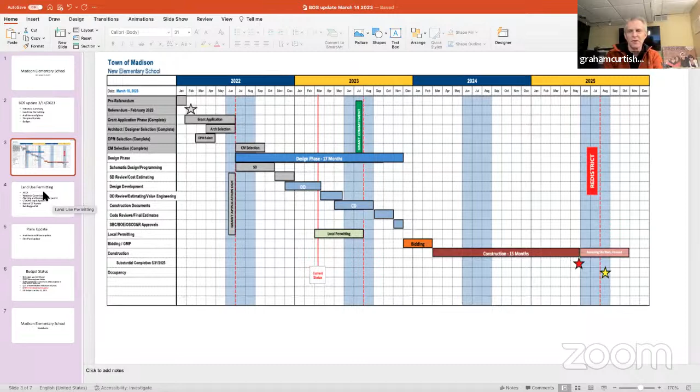Very good team, great job. I'm only a slight participant - the building committee's been great. We've had excellent owners reps on the call. Staff were great, so it's been very collaborative. I can hardly take credit for it. Colliers is doing a great job, and Adam Leviticus, who's on the call, has been a shining example of how to be an owner's rep.

That said, we're just starting this process now - the land use permitting process, outreach, and input. These are some of the boards we'll have to go through. The ACA, I'm sure you're all aware of - they'll review the plans for architectural and site plan issues, and they're advisory to the Planning and Zoning Commission.

We've already had some preliminary discussions. I think they may already have the plans, and we'll be meeting with them over the next month. Obviously we have to go through this process before we go to Planning and Zoning.

The Wetlands Commission will protect the environmental issues of the town. We've submitted that application already, and there's a site walk planned with the commission on the 18th of this month. They'll be hiring their own expert to review the plans, and we'll go back and forth with comments to make sure there's absolutely no impact. We're very comfortable with the plans right now, but we appreciate the input from outside experts.

Probably in May there'll be a public hearing. They've already determined this is a significant activity. There'll be a public hearing, input, et cetera, and hopefully come out of that in May or June with an approval.

Planning and Zoning Commission - this is a special permit because it's a school use in a residential district, so that will require a special permit and a public hearing. That process will probably follow the ACA and Wetlands Commission process, or run parallel to some extent, but it won't be approved until after those other elements conclude.

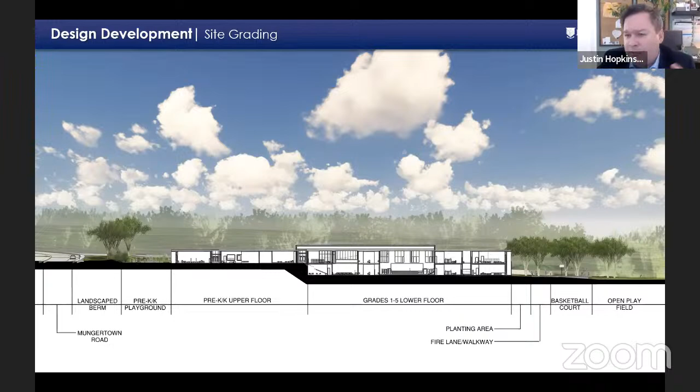To illustrate the topography change, here's a simple site section showing Mungertown Road to the left and the lower area of the site to the right. At the main building footprint, we're at grade closer to the western portion of the site, and at the lower level we're at grade at the lower portion. So from an accessibility perspective, for egress and access to the playscapes, each level of the building is at grade.

So I'm just going to move the audience out of the way. As Graham mentioned, we're studying locations of parent pickup/drop off and bus pickup/drop off. The current plan is to provide parent pickup and drop off in the lower parking area, allowing for visitor parking in area C and staff parking in area D.

We have approximately 185 parking spots available in the southern parking areas. Our age-appropriate playscapes are indicated in E. We have our pre-K and K playscape closer to where they are in the building, plus a hard court basketball court and an elementary age playscape.

One thing to mention about the bus pickup and drop off in the northern portion: we're investigating the concept of fleet-style or regatta-style parking for bus queuing. The impetus is to make sure we get the buses off the street so they're not queuing on Mungertown Road.

One potential benefit of this is that during off hours we can use it as overflow parking, accommodating approximately 40 additional parking spaces. Think of a basketball tournament on the weekend, or a STEAM or book fair night, where there may be more members of the public needing to park. The goal is to get everything off the street and onto the site.

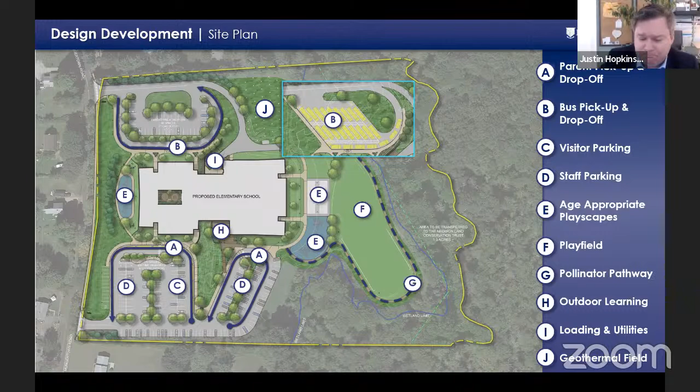So just a description of how these floor plans stack. You won't be able to read any of these floor plans, so consider these diagrammatic. The main level is to the top of the screen, the lower level to the bottom. You can see this in the exploding axonometric to the right, showing how these floor plans stack on top of each other.

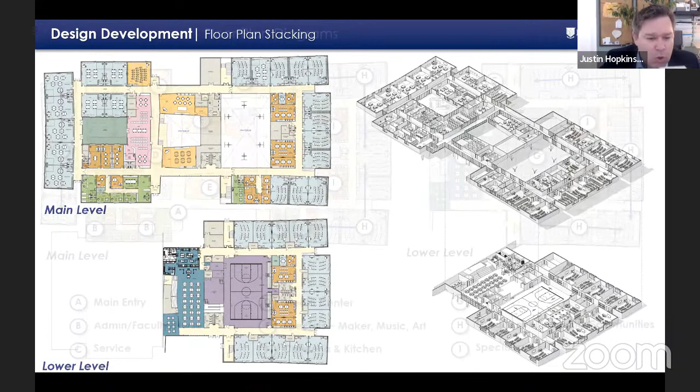From a building diagram, our main entry is directly adjacent to the parent pickup and drop off, and on axis to the bus pickup and drop off. Our main entry is through a secure vestibule to the administrative area.

Here we have our building admin and our nurse suite. We also have some faculty space closer to our curriculum areas.

In broad summary, our learning communities are indicated in H. At the main level, we have our kindergarten and pre-kindergarten. Towards the western portion of the floor plan, we have grades 1 and 2 towards the eastern portion. We also are locating our specials towards the heart of the building.

As you walk in, all of our specials are right in the middle of the floor plan, organized between the lower level and the main level, and within close proximity to each learning community. On the main level, we have our media center, art room, STEAM, and music.

The areas indicated in I are our special education and resource areas. What we've tried to do is locate them close to the learning communities in order to support any type of pull-out or push-in special education or resource closer to the students' classrooms.

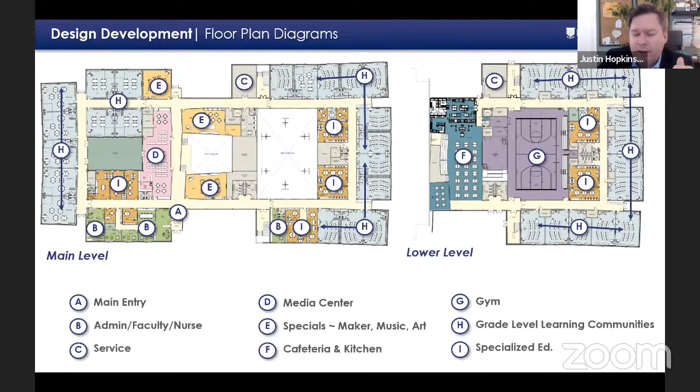Larger floor plan of the main level. A couple of things to mention as we're focusing on this: we do have an enclosed courtyard that is near the kindergarten and pre-kindergarten area.

This courtyard is open to the air, and the building perimeter goes around it. It's accessible through this corridor, but also accessible through the media center.

Our areas that are open to below on the main floor are the gymnasium. There's a wall, and the gym is a double height space, so along the corridors of our learning communities, we're able to look into the gym.

We also have a double height space over the cafeteria. One of the things that is really neat about this organization is that we have a tiered, or what we call a learning or communicating stair, that goes down to the cafeteria.

This double height space gives the opportunity to have informal instruction within the cafeteria outside of the lunch waves, but also helps connect the two floors, the main level and the lower level.

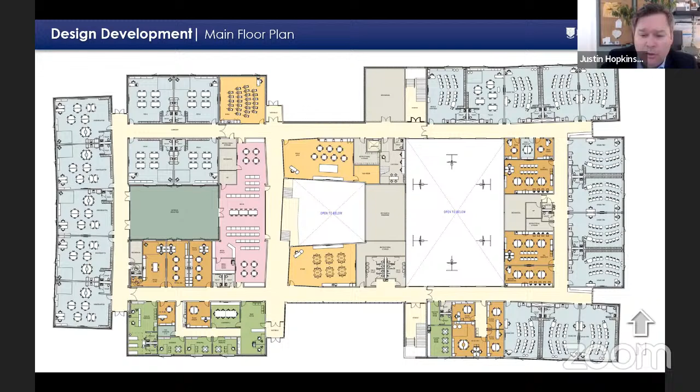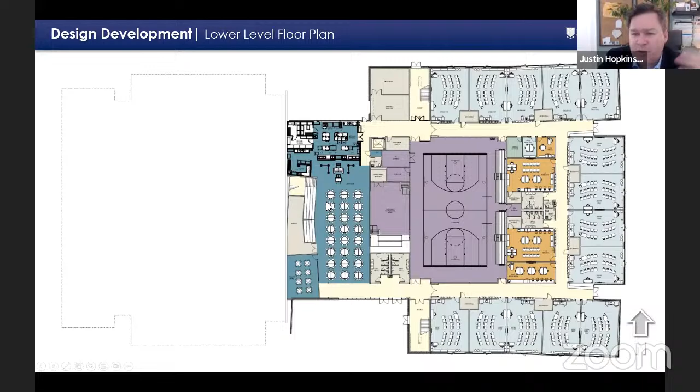As we go to the lower level, you will see we have some tiered or terrace seating that is directly on axis to the stage, but also fronts the cafeteria. The idea is that this double height space allows for some interesting, dynamic communication between the upper level and the lower level.

We have an in-classroom toilet space. We also have an area we call focus and learning, where the furniture or desks can be arranged in any way to support traditional learning, group learning, peer-to-peer, etc. We also have an informal activity space towards the back of the classroom for free group project-based learning, etc.

Some of the things we've been studying with the team are the flexibility of the furniture within these classrooms, the location of both fixed or built-in millwork for storage, and also what will ultimately be part of FF&E.

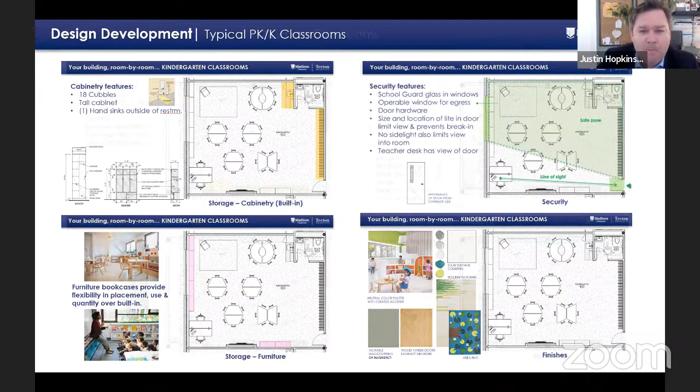Unfortunately, these are always considerations that we have as we look at these things, the ability to shelter in place during a lockdown scenario. So that's extended to our typical grade 1 and 2 classrooms.

You'll see very similar diagrams. The thing that's unique here is our grades 1 and 2 classrooms also have an in-classroom toilet. They also have cubby storage within the classrooms.

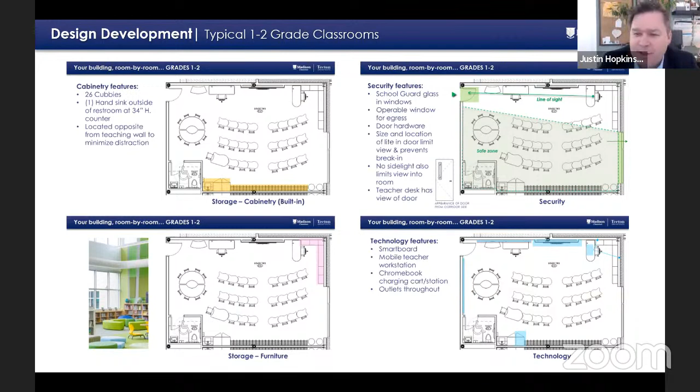The other thing we're obviously working through is where our technology is located to support the traditional teaching station instruction, but also make sure we have areas for mobile workstations, where Chromebooks can be charged, and where some of the power and data is within the classrooms. I know they're more detail-based conversations, but it's important for you to know that we're going through these.

Grades 3 through 5 classrooms, similar diagram, making sure that we're providing the same concept of the ready, set, go, focused learning and small group learning. Different type of furniture in here to support a more typical classroom setup, individual desks. These desks in particular can be organized in a number of ways to support a traditional bench setup, individual desks for test taking. They can also be grouped together for group-based learning as well.

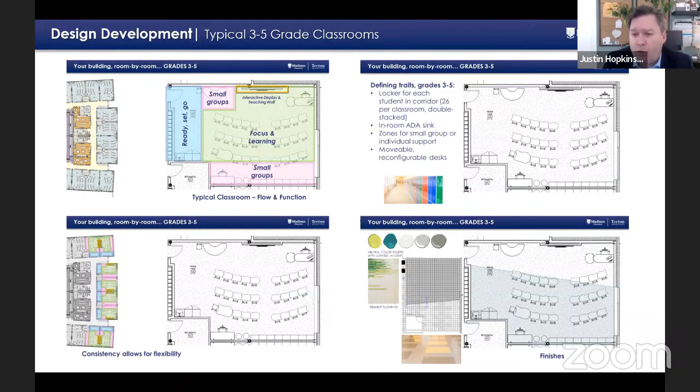And then finally, a perspective view to the entry cafeteria. This kind of reinforces some of the topography that we were discussing in the site plan, where we have the upper level main entry up the hill here, our informal learning area down directly adjacent to the cafeteria.

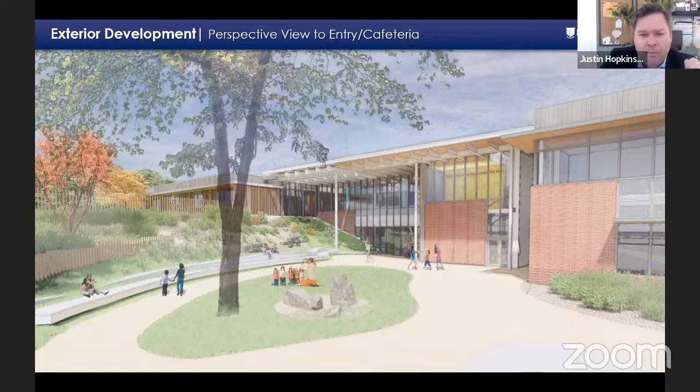So the idea is that for events such as that may occur in the cafeteria or the gymnasium, we can support a separate entry that allows community use of the gymnasium without getting into any of the curriculum spaces. So this area in particular would likely be the community entrance for those instances, nights, weekends, when an event is occurring there. So at this time, that's basically where we are.

As Graham mentioned, we're wrapping up our design development. Very interested in getting through the cost estimate process and reconciliation process. With that, I'm happy to toggle back to any of the slides if you have any questions relative to the material that we showed you.

Well, I want to thank you for the presentation. It's the first time actually I've seen all the designs, and it's very exciting. It's going to be a beautiful school.

I think one of the things when the discussion about purchasing the property 2 years ago, it sounds like there are some limitations because of the topography. So you can't have as much parking as maybe ideally you'd want to have. So it might be helpful to understand that a little bit more, like what restrictions you've had to moderate the design. It sounds like elevations. Is that because otherwise you'd have to do a lot more site work to level it all on one level, or is that intentional to just make it more aesthetically pleasing?

So I can tell you it's very rare that we have a completely flat site, and we have had a number of new buildings that have incorporated the changes in elevations on a site. So from a topography standpoint, the building layout works actually very well. One of the things that is nice about it, and I alluded to it as part of the presentation, is that we're able to get an at-grade means of egress at both floors, which is something we wouldn't be able to do if we had a flat site and had, say, a 2-story building. In the event of an egress situation, we would have to utilize some of the vertical circulation, elevator, stairs in order to egress.

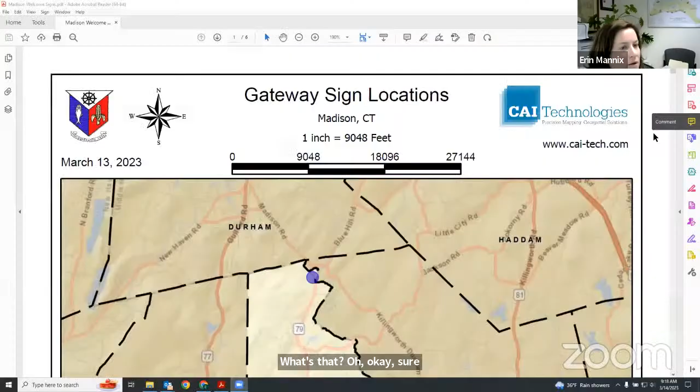Just kind of put together, and Sherry, maybe you would articulate this a little better, but basically, Sherry and I worked to put forward, and Sherry put the application before ARPA for funding for gateway signs, welcome signs, Town of Madison welcome signs at 10 entrance points essentially into town.

Those would include the north end, as you can see here. I can scroll out a little bit more here. The north end at Durham and Killingworth line, essentially on 79, the east and west entrance points on Route 80, and the east and west entrance points on the Post Road at Guilford and Clinton, and then 5 additional off ramps for Interstate 95.

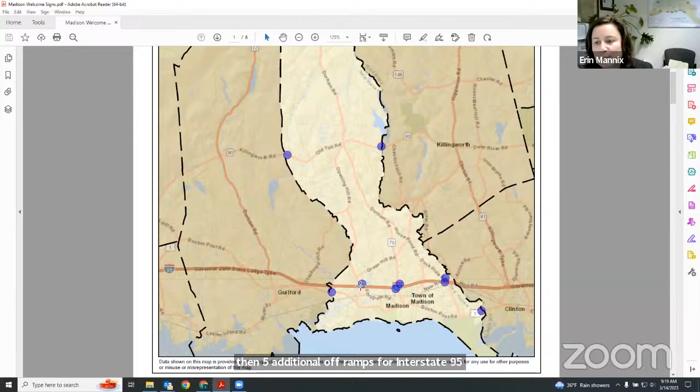So those were the 10 locations that were proposed to ARPA, and funding was received. And the funds totaled, I believe, 67,000. Sherry, was that correct? Yes. And that includes additionally some money for solar lighting so that those could be illuminated during nighttime hours without added expense to the town.

So we had met with a couple of vendors just to kind of get an idea and understand signs a little better and materials, and we saw a couple of examples that we thought were kind of nice. Starting from fresh here, we decided to use an example that we saw from the town of Voluntown that was really nice, carved letters. It's a high density urethane material, which is carvable. It wears like wood, but is a lot more durable. And so we just had some renderings put forward, various colors, various options.

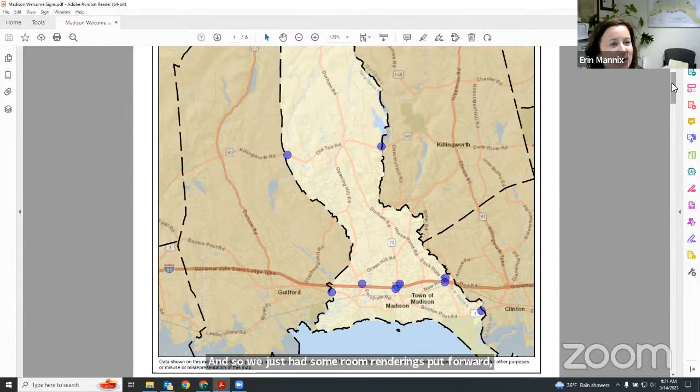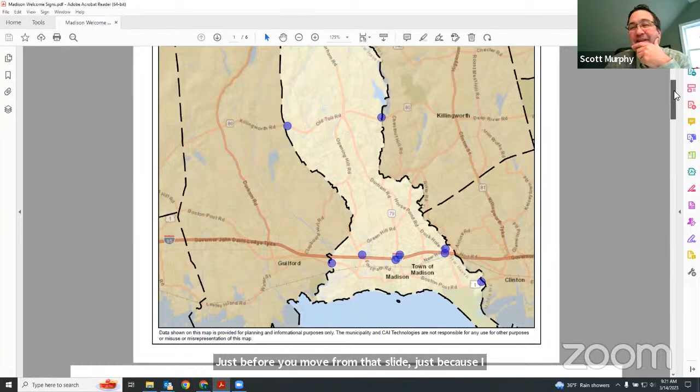We kind of liked the shape, but are really looking for some feedback from the board. And I can give you, just before you move from that slide, just because I live here in good old North Madison, and the other zip code, is there a way to put a sign also in the circle? I mean, it's just such a focal point of our town. That's a good question, Scott.

So the gateway sign is the first step in our wayfinding sign package, and there are other phases. One will be directional signage, and that's pretty much what's on the circle now, in terrible condition. We have a bunch of these throughout town. That's our next phase, is to get, once we get a style that we like now going forward, and trying to design these gateway signs, update them.

We do have a map and location of all of those signs as well in town.

Just to make sure that the wording is appropriate for what we have. Our thought was not a general welcome to Madison sign, since you are kind of in the middle of Madison.

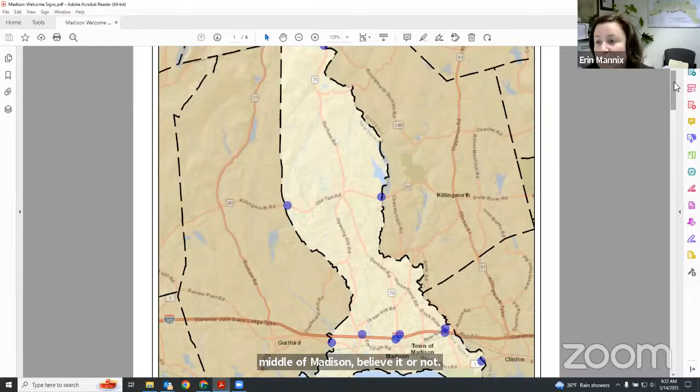But I agree that we do need more directional signage, and that would be one of my recommended locations for that. So these are really just the gateways in.